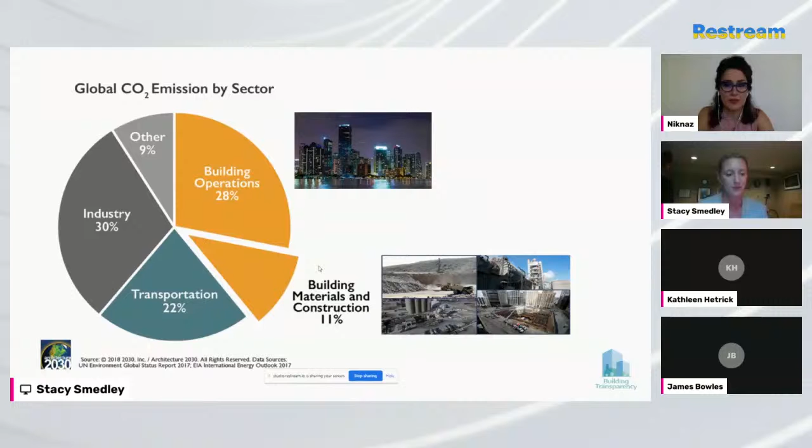Between those two, buildings account for almost 40% of global CO2 emissions. Actually, we believe it's even more than that, because some of these emissions spill over into transportation of materials and other industries that may not be accounted for in that 11%. So all that to be said, CO2 emitted by our building stock is a very big component of global CO2 emissions, which are of course impacting our climate.

I like showing this graphic as my cartoon version of how to visualize these emissions. If you think about operational carbon, light switches go on, HVAC units start working, and energy grids are giving that energy for all those things to happen. To the left is everything else: how we manufacture materials, transport materials to a construction site, install materials, replace them during a building's life, and then demolish them at the end of that building's life. All of that is in this embodied carbon emissions bucket.

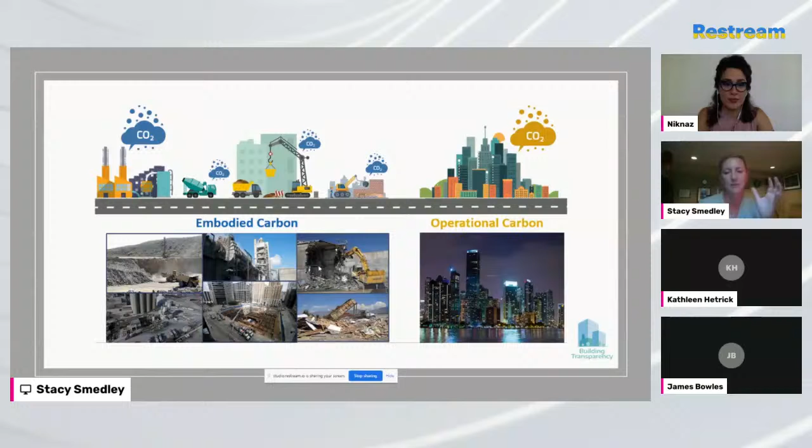We have tended to focus on this operational carbon bucket most explicitly over the past 4 or 5 decades. So there's an urgent need to catch up in terms of our understanding on embodied carbon.

Another reason for this urgency is that we are building a lot. In the next few decades, we're building over 2 trillion square feet of buildings worldwide, which is about the equivalent of a New York City every 30 days for the next 30 plus years.

We now know that these embodied carbon emissions, when you look at a typical building, can be half, if not more, of a building's emissions over its life. That's because they're spent at the time of manufacturing and installation, largely in terms of these emission sources. And we are getting better at the efficiency of our buildings when it comes to operational carbon, as well as decarbonizing our grids. So embodied carbon becomes vitally important.

I'm not going to go into all the technical details in a longer presentation, but there are these stages of emissions that we're talking about. Work that we've done at Building Transparency really puts a pin on the point that the majority of these emissions for major construction materials—this is looking at concrete—are in that production stage, how we make the material, which means we have to make the decision on a lower carbon material at the time of production and specification. This blue bar is the production, and then everything else, transportation, is on top.

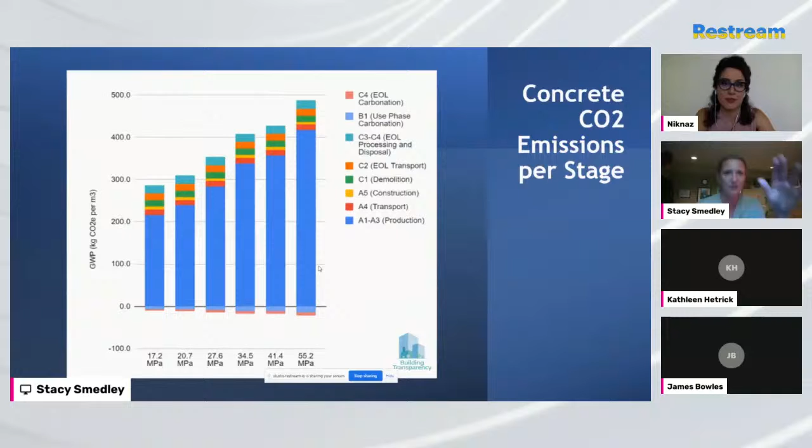Just another example, the same is true for steel. If you look at the manufacturing emissions of steel, even next to the transportation globally of steel, those manufacturing emissions are the place where the major emissions are happening and need to be reduced.

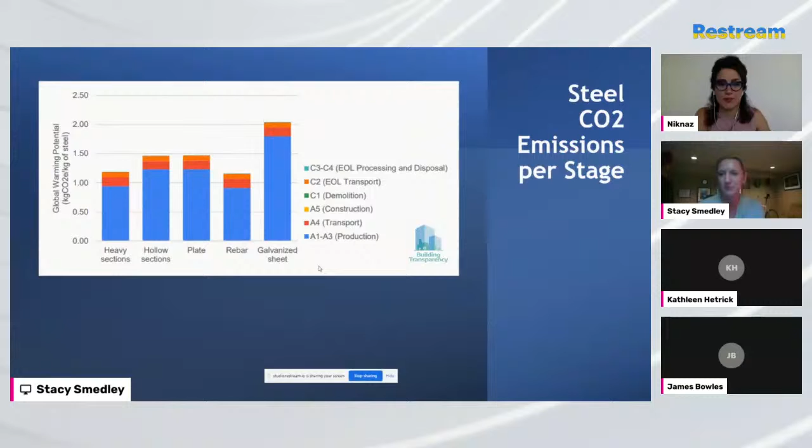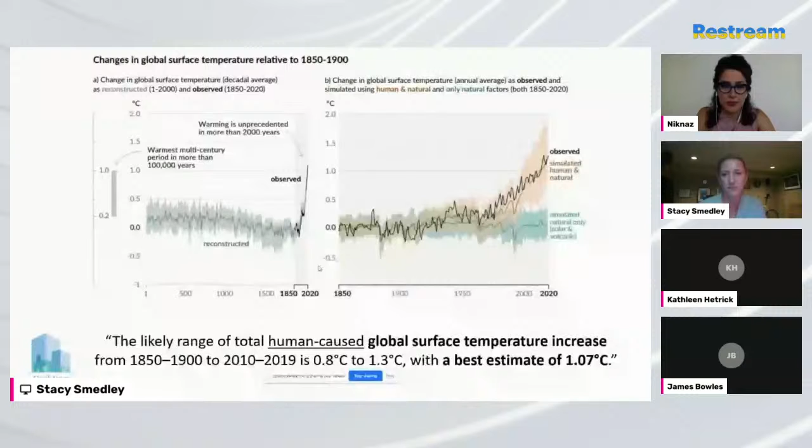We are at a tipping point when it comes to this, based on what's happening with climate change and the commitments that we're seeing come out of various places. We're trying to meet our temperature increase limits. We're understanding that we're actually blowing past them with the new science reports coming out of IPCC. And we're actually now experiencing this.

I love this graphic of what was predicted to be 2050 by a weatherman in the UK, and then what happened just a week or two ago of us actually meeting those 2050 hypothetical temperatures. So the time is now for us to really reduce.

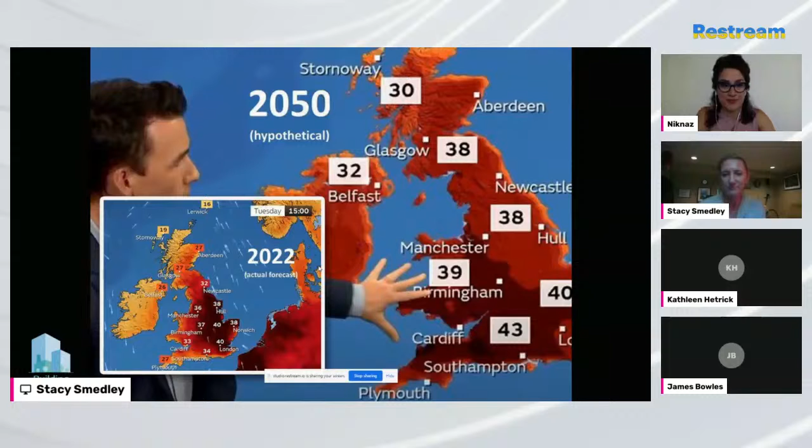At the same time, we're seeing commitments coming at both the private and public sector. Private corporations are building in zero carbon commitments around these embodied carbon emissions of what they make and what they build, and now actually trying to meet them.

On the public policy side, we're also seeing this notably in 2 different places where Building Transparency is engaged. One is through the United Nations work to create a decarbonization initiative around concrete, cement, and steel, using disclosure and reduction targets that countries could sign onto.

And then just this week, in the bill coming out of the federal budget, there's about $5.5 billion in investment for disclosure of carbon emissions of building materials by manufacturers, and procurement pilot programs that would incentivize low carbon materials to be procured. So that's very exciting here where I sit.

Building Transparency is a nonprofit where a lot of this work is happening. It's a nonprofit with a mission of providing open access tools and data that can help reduce embodied carbon emissions. We're funded by a variety of different sources across the AEC industry. This is important because everyone has a role to play, whether you're an owner, architect, engineer, contractor, or material manufacturer. Everyone needs to be invested and engaged.

Very quickly, because I only have about 4 minutes left, the way we're providing this data to industry is through a free, open access tool called the Embodied Carbon in Construction Calculator, or EC3. You can go to our website and register for free.

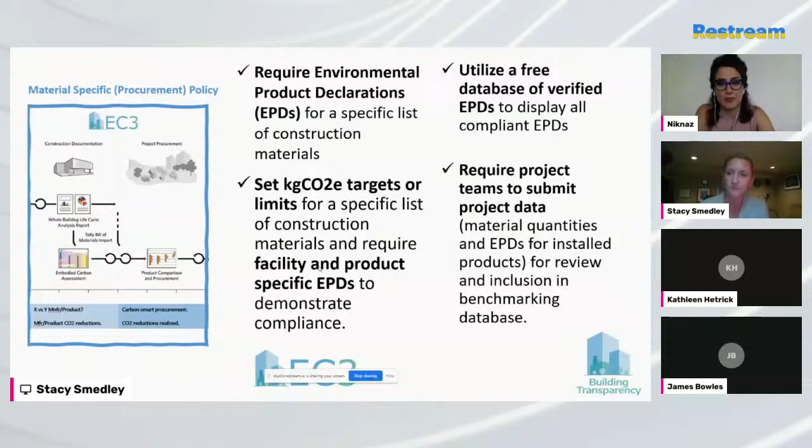A little bit on EPDs. They are the nutrition labels — third-party verified documents of carbon intensity per unit of material. Think about going down a cereal aisle wanting the lowest carb cereal. If you're on a low-carb diet, you get the carbs per serving size. For an environmental product declaration of a material, it's kilograms of CO2 equivalent per unit of material. That's really what EPDs are providing when it comes to understanding carbon emissions of products.

What EC3 allows you to do is go in and actually start doing comparisons across different manufacturers, whether it's concrete or carpet, understand the carbon emissions of all their products, and begin to select low carbon options.

What this means, and what we're already seeing, is as we begin to decarbonize and have this data to make informed decisions, emissions from manufacturers are beginning to lower. Here in Washington State, where we've had environmental product declarations and owners like Microsoft, contractors like Skanska using this data in EC3, there's been an almost 20% emissions reduction for concrete suppliers in our local market.

I'm going to skip through a very quick walkthrough of the tool. You can log in and register at buildingtransparency.org. What we're trying to do is catalyze digital information of these environmental product declarations for a suite of building materials that folks can access and use for comparison.

Walking through how I do this for concrete: you click on concrete, then ready mixed, then next, and dig into concrete specifications — specify a strength and a geography, then click search. That returns all the results of mix-specific EPDs for concrete. You'll see here it's telling us we've got 591 EPDs across all suppliers in Washington State, with the carbon intensities of their 5,000 PSI mixes disclosed. This tells you directionally who the lower emitting suppliers are for concrete in that market or region, enabling you to dig into their products and mixes to make an informed specification choice.

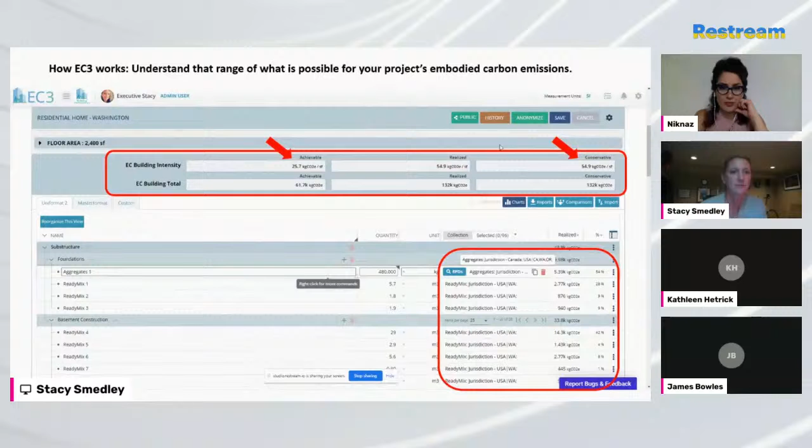Very quickly on the project side, you can build up a project in the tool and put in your quantities. This is very much like cost estimating, where you have carbon intensity per unit versus cost per unit. Here are all the different inputs for the quantities, and here's how you search for those collections of EPD data or actual EPDs within EC3 to set the carbon intensity — enabling the math where quantity times carbon intensity gives you a range of what's possible based on all the suppliers in the market.

You can also visualize where your major impacts are for your project. On the left here is the carbon intensities of concrete versus sheathing panels. So if I was this project, I'd really want to focus on concrete first — it's the biggest carbon impact. Then you can roll all the way up to a building level view of the target you could use for reduction.

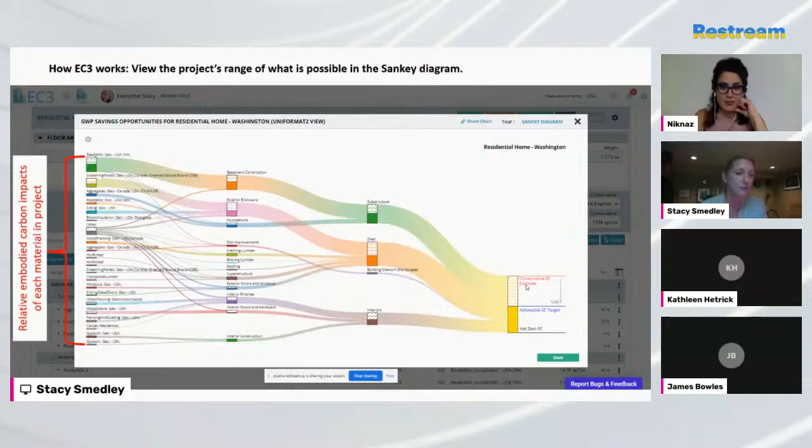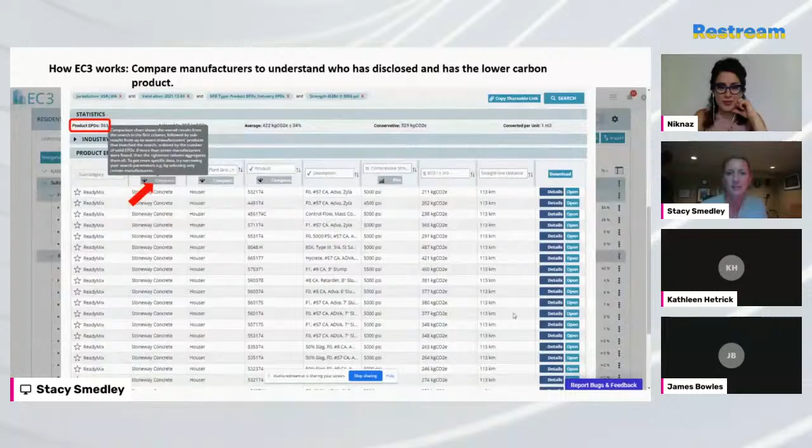I'm just going to skip some of these to save time, but I can go back and click on compare, like I showed you previously. See that Stoneway is my lowest carbon option for my concrete mix. I'll select a Stoneway mix that I think will work for my project to see how it compares to the whole range of mixes for all the suppliers, and then use that in my project to get to a realized carbon accounting for that input.

So again, this is all about getting the data necessary to understand what you actually spent on your project from a carbon perspective, to send the signal to the market that we need this data to be able to do these kinds of accountings. And of course, EC3 is a free tool to hopefully make this as accessible as possible to everyone in the industry. I'm going to skip around a bit because of our time.

I think what we're seeing at this tipping point is that this is becoming something people are beginning to understand and want to do. We've got about 25,000 users of EC3 in 70 countries. Over 2,300 projects have been entered. And what I love most is how many EPDs we're getting now for all these different products in the tool. This is looking at concretes of over 40,000, and for all our other materials, we're up over 3,000 now in terms of construction products with these product-specific environmental product declarations.

This was amazing. Thank you so much, Stacy.

I just have a quick question, and then we'll ask the rest at the end. Are architects and contractors already using EC3? So are architects and designers also using the platform?

And it's really important here, the stuff in the middle, that we think about how this ends up impacting communities as well, because it's not just a carbon story that we're good about. It's also a human health and environmental justice story.

So all along the way, whether we're thinking about the fossil fuels we use to make the plastics in our piping or the manufacturing of the steel, like Stacy was talking about, the construction processes, even how we get rid of things. My brother's a firefighter. If the material that burns up in people's homes and businesses is made with high carbon toxic materials, my brother's health is impacted. So we have to see the whole story and think both from the climate issue, but also the here and now, that human health issue and who's really getting impacted, right?

As designers, architects, engineers, whatever you want to call yourself, we have so much power to do this. And it's real. It's not just cute little graphics that our amazing graphics team made. This is real life for people.

So I'm sure wherever anyone's calling in from, you've seen these, Louisiana, Warsaw, it's similar wherever we go. So it has real impacts, and it's not just about future generations. I mean, I know it's important to think about kids and what's going to happen in 2100, but right now, air pollution is an issue that we can attack when we attack carbon and when we attack our supply chain and attack energy efficiency, right? That's what decarb's all about.

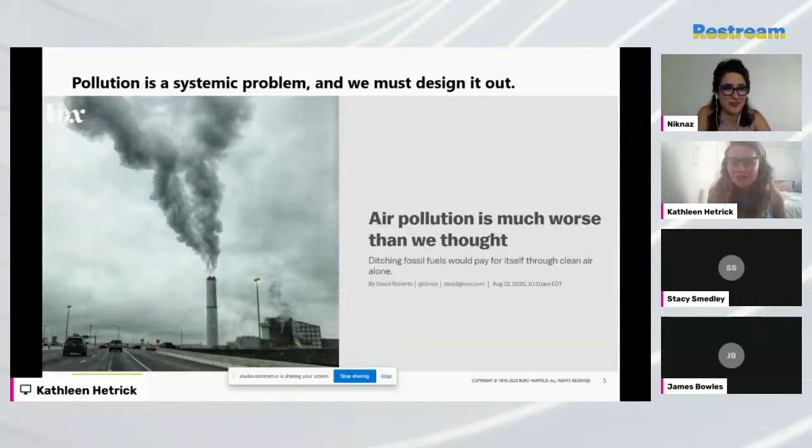It's the here and now, and also thinking about the future. So really exciting that we're getting some federal stuff passed in the United States. It was really a shining light in my life yesterday. And we got to push harder, wherever we are across the globe. At least for us in the United States, all of this decarb work is really important, but we really need to think about environmental justice too.

You can read the great Dr. Robert Bullard. He talks about America being segregated, and so is pollution. And that zip code today, where we live, is the most potent predictor for an individual's health and well-being. So we need, in the building industry, all the great technology stuff, all of the cool, amazing design, Pritzker Prize winners, Living Building Challenge. We can't just think about the occupants that we're designing for. We have to think about everyone that touches this, because too often industrial pollution from our building materials or from the power that we put into our buildings is harming the health and the environment of communities that we don't build for. So we really need to think about this as an environmental justice issue.

So I'll get off my soapbox, one more thing. And I think I'll talk about construction. We'll talk about energy real quick. All of the great work Stacy's doing around how do we clean up industry through embodied carbon. Again, these pollution disparities, we see it across the board, right? Even the way that your facade is coming into a port and then getting trucked to a project site, that's pollution, that's carbon, and it's impacting people of color more than it is for white people.

So we really need to think about this from an environmental justice point of view. And again, if you're working in the ESG space, trying to figure out how social indicators or governance works, all of this gets tied together into that. It's not just an environmental issue.

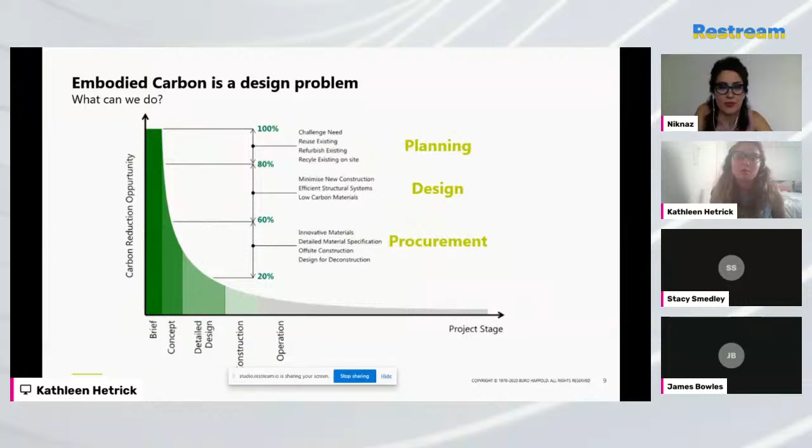A lot of these graphics are from EC3, my favorite tool in the world — I'm in it every day. If you're working with concrete, really start to work with your concrete subs as soon as you can. Ask them about recycled steel for your rebar, ask if they've got fly ash available, slag, maybe they can use 1L cement in there.

And always push your structural engineer — they can save you money on projects, and they have the power to cut carbon. So these are kind of the top things I'd recommend. Really sit down with your subcontractor and ask if they have EPDs for concrete, and how low can they go while still meeting their performance requirements. And ask your structural engineers if they've got GWP targets in their specifications, and if they don't, ask them to do better.

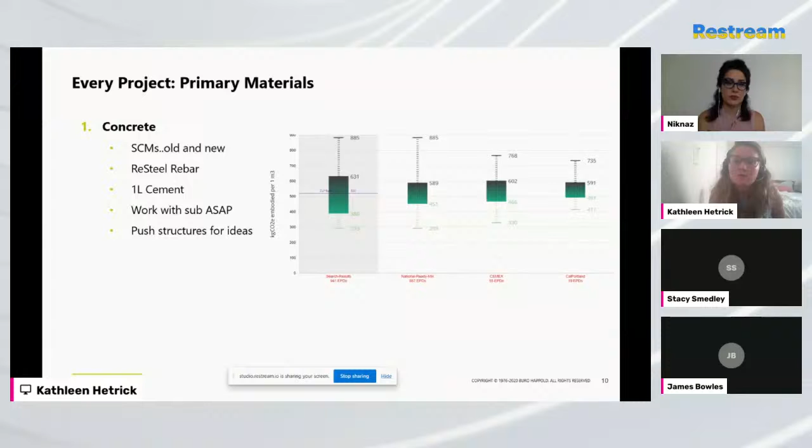Steel comes in such a wide variety of shapes and sizes. Right now, just even choosing wide flange over HSS can really help move the needle. Don't forget all the other steel elements in your projects, like your metal deck and your studs — if you go with a better procurement option, you can reduce some carbon there. Always ask what your local options are. Can you use electric arc furnace instead of blast furnace? EAF will shred carbon in your project like no tomorrow.

We have a lot of it in the United States, and some available in the EU, but if you're working in Asia, you really have to see what technology's out there. We need to be hammering on investing in clean steel, either through green hydrogen or electric arc furnace. It's really something we need to do, and always choose local — if you can work with a local manufacturer rather than shipping it across the world, that's always a really important option for steel.

Work with your subs on fabrication — it reduces cost. When we do our Revit models and come up with some amount of steel we're going to procure, and then suddenly that number doubles, that's not just more cost for your project, but more embodied carbon. So really work with the steel subs on how they actually fabricate and make this stuff, so it's great to not have a surprise halfway through CA where you're sitting on top of a lot more steel than you thought.

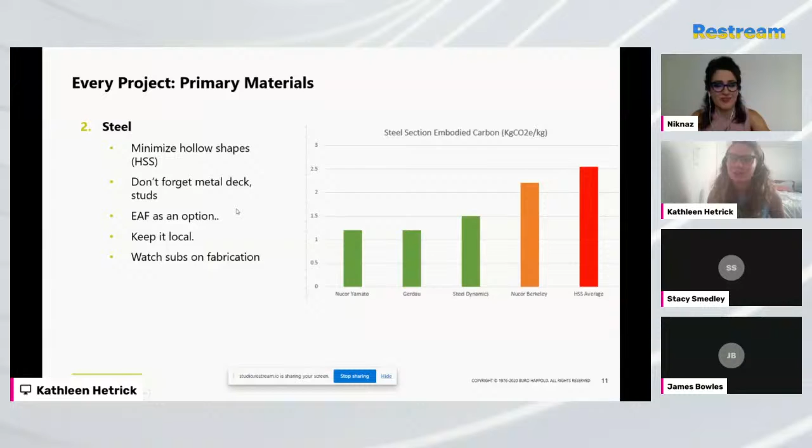For enclosures, I think you can read all the bullet points here, but I would say get XPS out of your projects. I know it's great for energy efficiency, but it's terrible for cancer and it's terrible for carbon. There are a lot of cool companies now doing very high-tech, super sustainable versions of XPS — I think Owens Corning's got a product that isn't using dangerous HFCs to make it.

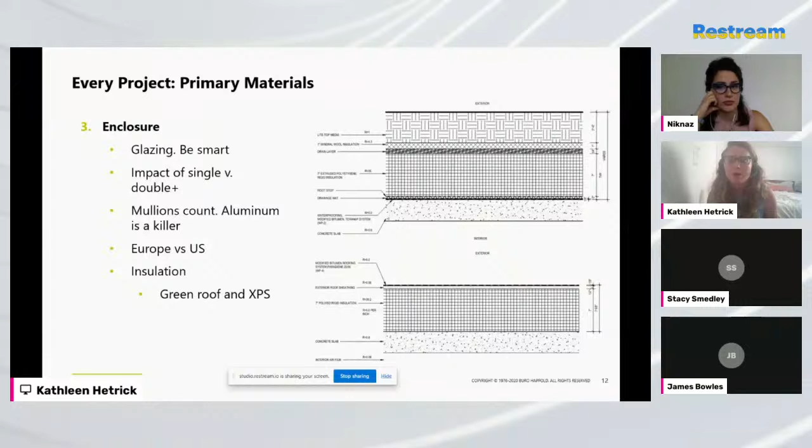Whatever you can do to get it out, insulation is always kind of that top thing to take a look at in your details. See how you can remove this, because it really packs an embodied carbon and a health punch. For your wall assemblies, architects design these every day, in and out, you've got your standard details—go into EC3 and really dig into it.

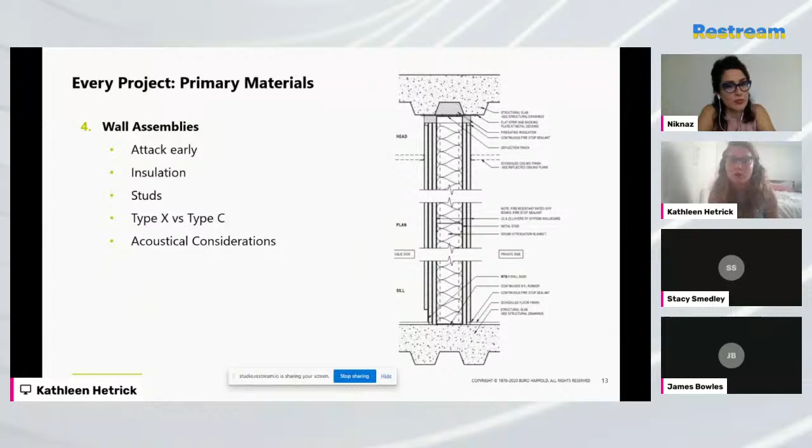How can you choose the most sustainable wall board? Can you try out sheep's wool insulation for your batt-on projects? There's so much you can do to just have a standard detail that's super low carbon. And it's a hard job—you also have to think about acoustic considerations and what's going to meet your client's requirements. But we really think that having really great details with super low embodied carbon, you can do a lot with your wall assemblies.

And finally, floor and ceiling—just simplify it. You don't have to have a concrete slab and then carpet on top of it. Just keep the concrete slab, but maybe that concrete doesn't need to be 5 inches. Maybe you can be a little bit smarter, separating the structural elements from the aesthetic elements.

There's a lot of EPDs out there for carpet—really good ones. You can go with some really low, almost carbon-neutral products that are way better than business as usual. But you can also look at some of the tried and true stuff: find reclaimed wood, go with bamboo flooring if it's FSC certified, even using linoleum, which is made out of linseed oil.

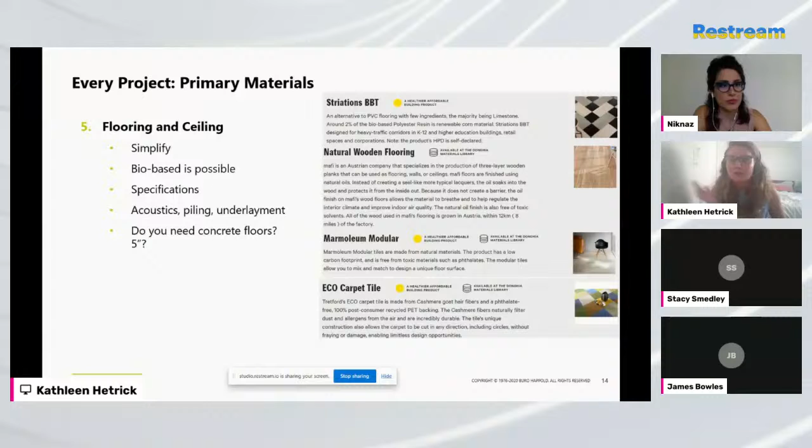So there's tons of options out there, and always use the healthy materials list from Parsons. They have a great list of biomaterials that are sustainable and healthy for people too. So that's just my recommendations for decarbonizing embodied carbon.

Anytime you're thinking about embodied carbon, think about the health impacts too. Concrete and cement making releases a lot of particulate matter, which gets into people's lungs—an issue for COVID, an issue for asthma, an issue for COPD. So every kilogram of carbon you're reducing, you're also improving human health somewhere, even for the people who are mixing it in batches on site. So always think of these two things together.

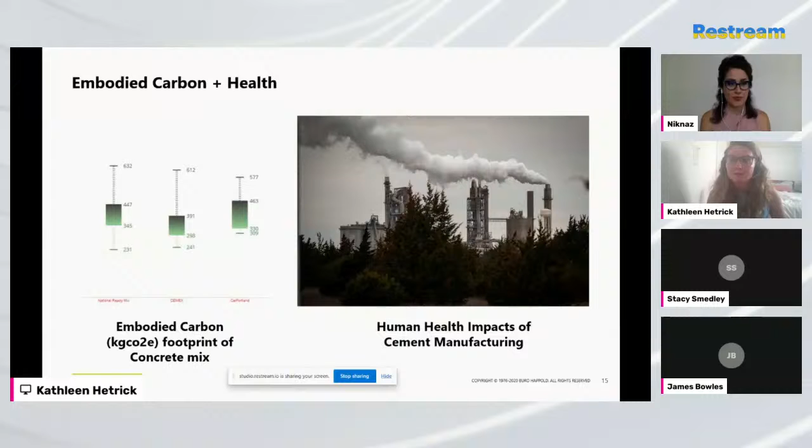On the operational side, I'll quickly talk about a project we have in Los Angeles. We've got a great climate, but if you're in any Mediterranean climate, this will all make sense for you. Basically, you want to throw a bunch of solar on there and make sure you've got a heat pump. Be careful in the United States because not all heat pumps have the low GWP refrigerants—that's a hard thing to think about, how can you do the right thing with refrigerants and the right thing on electrification. But really, it's kind of like a buckshot of lots of different things.

You have mixed-mode automated windows, so you can have natural ventilation—for architects, really keeping the width of your building in a pretty perfect range so that mixed-mode ventilation can work out. So the architect gets involved—if you're going to have a glazed building, you have to spend the money on high-spec glass.

We've also used phase change material, which is a really cool technology. It's pretty old to think about, but they're making it in new ways—instead of needing high thermal mass concrete in your buildings to make the most of those diurnal swings, they're now taking this... I'll show you a picture real quick. Oh shoot, maybe I deleted it—I'll find a picture and send it to you guys. But basically it's a material that acts like ice in that it absorbs heat during the day and releases it at night. It's a pretty benign organic material, and it can really help reduce peak loads in projects.

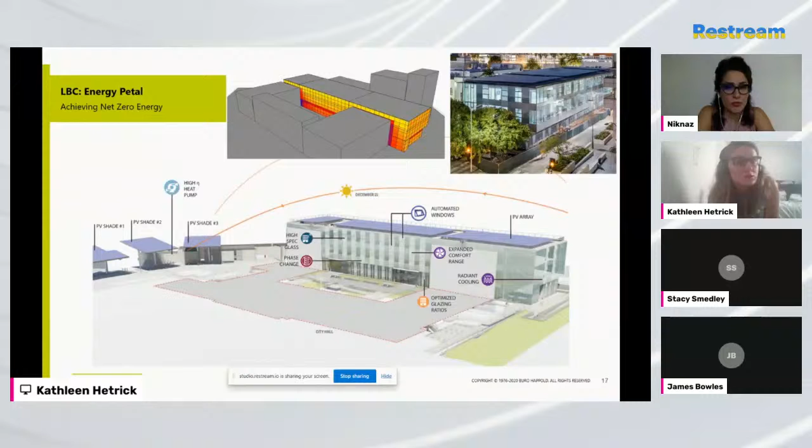Think about putting radiant cooling in your slabs rather than old school systems. This is really important for us, especially as we think of resiliency. It's going to get hot everywhere. Whether you're in Texas, Australia, or the EU, we're running into heat waves just last week.

So think about how buildings operate in the summer season. Can you do a lot of natural ventilation? Maybe during your shoulder seasons, can you open up the windows sometimes, check the air quality, and rely on systems like radiant cooling, and then always have a backup system, like even a dumb VAV system that can hit your peak loads. That's really going to help us design for efficiency and sufficiency.

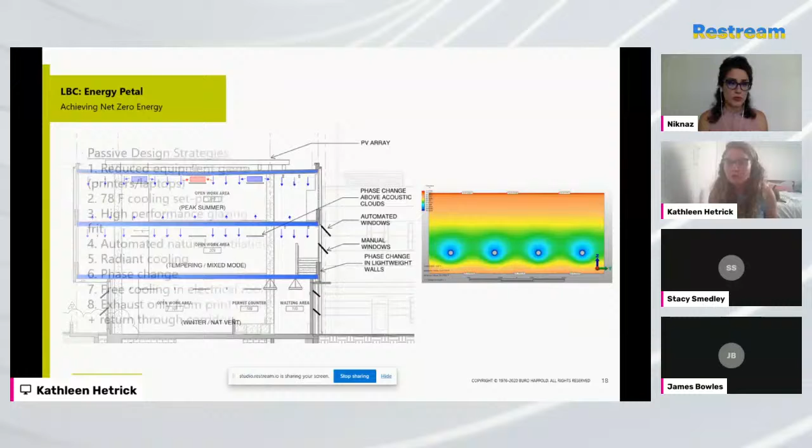And it's not just the technology, it's thinking about how to choose more sustainable process equipment. This is something we're seeing in a lot of projects, that the process loads are going up and up with our server rooms. So how can you work with the owners on choosing better equipment, getting people to get more comfortable with a higher set point? Push that up to 78 or even higher in some countries like India, where people are used to being in the heat, or in the Middle East.

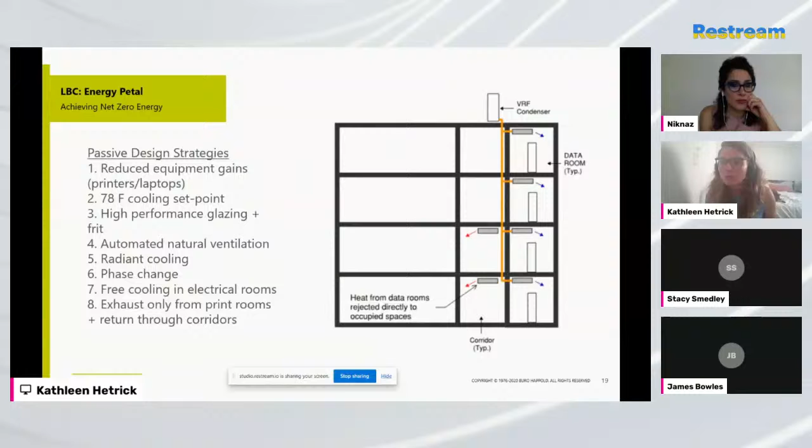How can we get people to really think about adaptive comfort, doing automated mixed mode ventilation whenever we can? That's how you can have electrification where you're not using any fossil fuels, you're just using heat pumps and electrification. But the main way we do this is energy efficiency and building less, so that we have to use less energy as a total. That's really what's going to help you, especially in climates where heat pumps have to work so much harder because they're in heat mode.

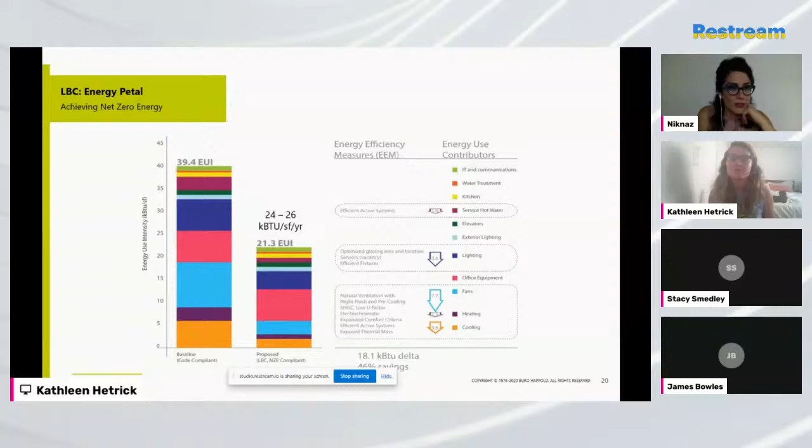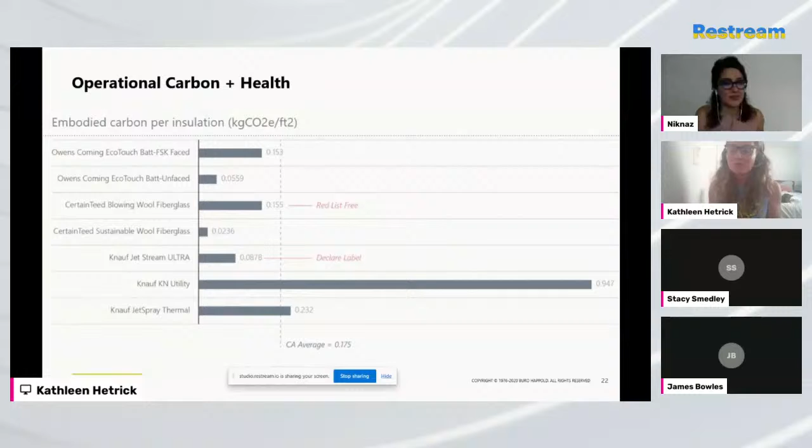If you're building in Chicago or Boston, the name of the game is still the same. We have to push these EUIs down as far as we can, and we have to use passive roles and active systems. There's still tons of health overlaps here too. When you're thinking about putting in your super high performance insulation, don't only think about it from your U values, but think about the embodied carbon.

Use the EC3 tool to look at the different options, and also see that some of them are red list free, or at least have a declare label, so you can really optimize in your specifications how you get your insulation to not only do great from the operational carbon, do great from the embodied carbon, and protect human health.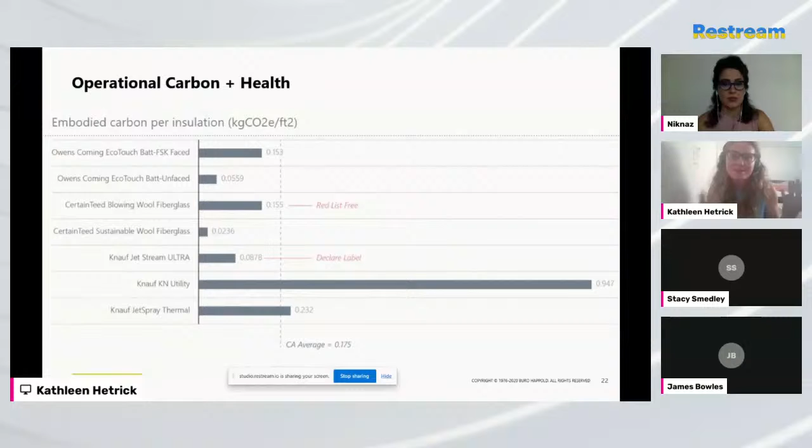My last couple of slides, and I'm going to go a mile a minute. On-site construction, it's crazy—it's so much carbon, we're not tracking it, and it's terrible. So really, we need to be pushing. California just came out with a lot of funding to go electrification for construction equipment. It's a ton, it relies on diesel. All of our construction sites rely on diesel every day, even worse than the typical stuff you throw into your truck or car.

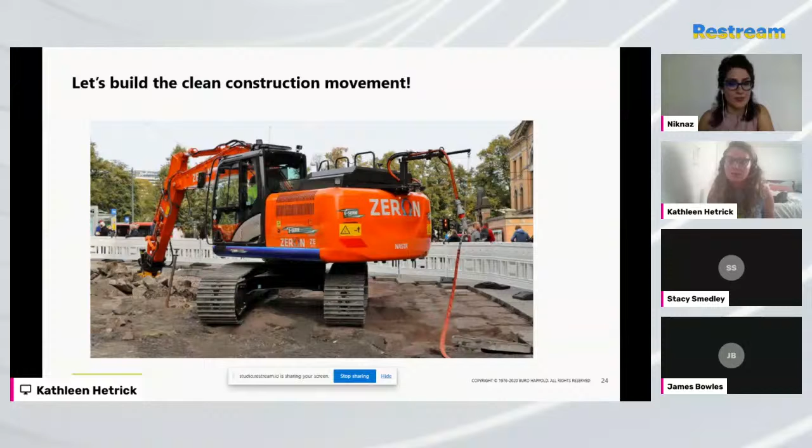So we really need to be asking equipment manufacturers like Volvo or Caterpillar to move into electrification, get them into our projects. There's some really cool stuff happening in Oslo, Scandinavia, and all over the EU right now that we really need to be emulating in the US, even in the way we're thinking about our fleets. This is a really key issue. Luckily, the C40 movement is looking into this through clean construction in Los Angeles and Mexico City, and a couple others are trying to pioneer this. How can we start to build a market for electrified construction equipment? It's really important, and it's out there—just start asking about it.

Ask if you can do solar powered light towers. Ask if you can throw some solar on the trailers. Move away from diesel—there are so many cool startup companies doing electric batteries with solar for backup in terms of disaster use. They've got trailers where you've got the whole thing together: batteries, solar, backup power. Get rid of those diesel generators on site, or at least make them as small as you can, and start asking about this equipment.

We really need to, and even ask if you can get renewable diesel poured into the fuels as a switch—that option is there. We've got great folks like Skanska doing it already. Keep putting pressure on your contractors.

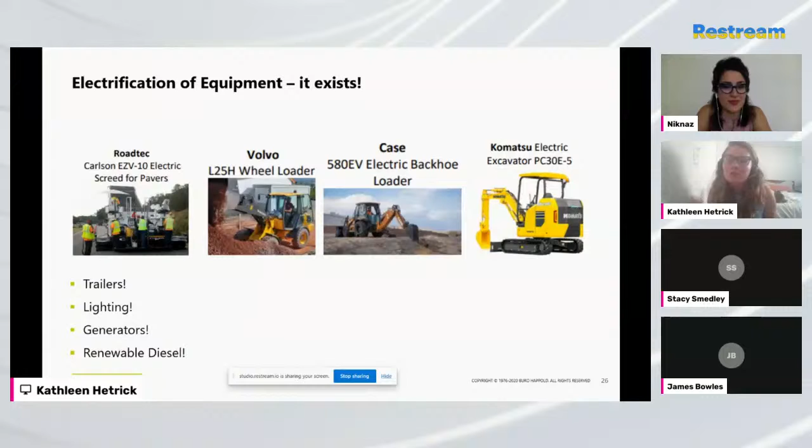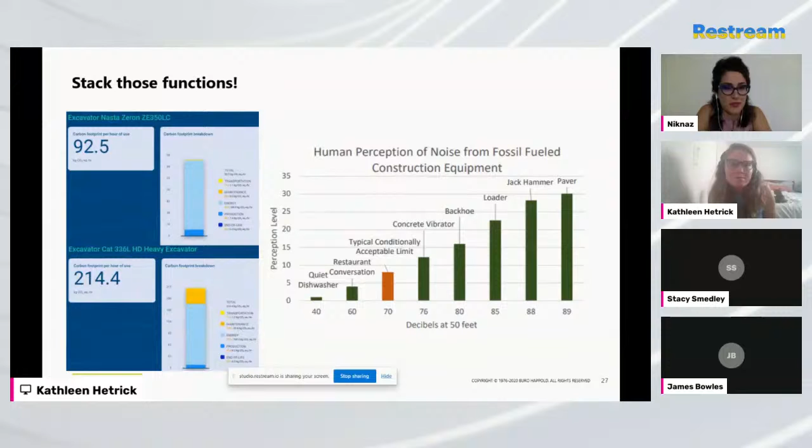This is really important because not only does it clean the air around construction sites, but if you've got an EIR or concerned community, it's also quieter. So everybody wins - less carbon, better air quality, less noisy. Construction becomes a nice thing, not a nuisance.

So I think that's what I have today. Just look around your cities and see all the different ways carbon manifests itself. In LA, we literally have oil and gas facilities right next to people's homes. Every ounce of carbon that we wring out of our buildings and get out of our real estate portfolios means that this doesn't have to be the case anymore.

We need to be putting pressure on our ports, on our airports. That all needs to get decarbonized, so that when we're pulling stuff in from our supply chain, it's really clean. We need to work with our manufacturers to make sure they're not polluting communities when we're trying to design a sustainable building. It has to be sustainable for the communities around us too.

We should be asking ourselves why aren't we on the front lines with climate youth leaders? Not just the Gretas of the world, but everyone, every local issue. Engineers, architects, we should be supporting them and getting involved on the activism side of things.

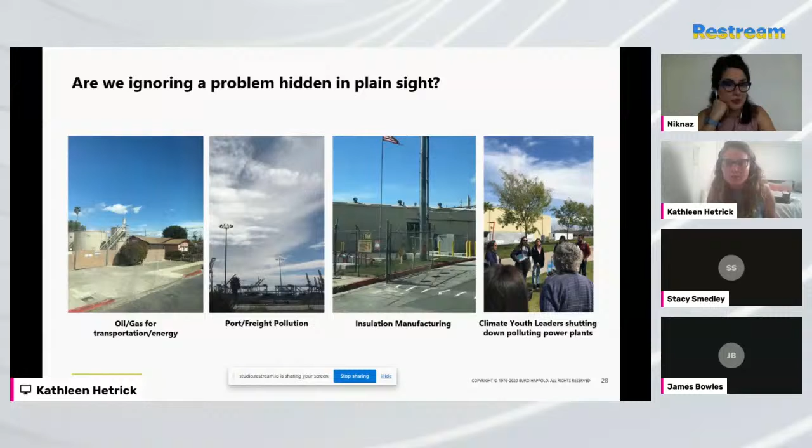Think about your project life cycle. Get local, keep your projects local, buy local. Look at your specifications - they're really powerful. If you're an engineer, an architect, or whoever you are, however you identify, your specifications are power. And if people don't care about climate change, sad for them.

Talk about health - maybe they don't care about human health. Talk about risk, climate risk, flooding, wildfires, power grids failing. And if they don't like that, they probably like money. I can guarantee you, if you really think smart, especially around embodied carbon, you can save people money.

And of course, listen and support your fence line communities. So that's my soapbox. Thanks, guys.

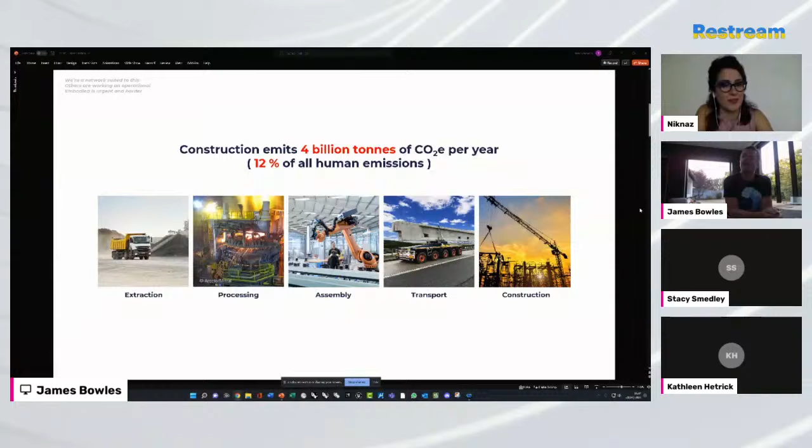I think most of us on the call, and Stacy and Kathleen, you've given a great starter anyway as to what embodied carbon is. It's a big problem, a serious problem. It's 12% of all human emissions, 4 to 5 billion tons of CO2. We don't even know that figure for sure. It spills out into other things. But it's a big problem, something we need to deal with.

If I give a little backstory to where the group came from, this is a post from 4 years ago from a friend of mine, Will Atkins, who posted the idea that all of us should be doing more for this subject. It's not the sustainability person on the project who should be dealing with this, it's not a section of the industry, it's all of us, literally every one of us. I'm not expecting anyone to read that, but if I go through to the next slide, let you read that for 10 seconds.

This is one of the founding principles for our industry group, the idea that all of us should learn more, share more, and do better with our decisions and what we do on projects, the way we go about them. So building less, building leaner, decarbonizing sites, selecting the correct materials, and just doing everything we can.

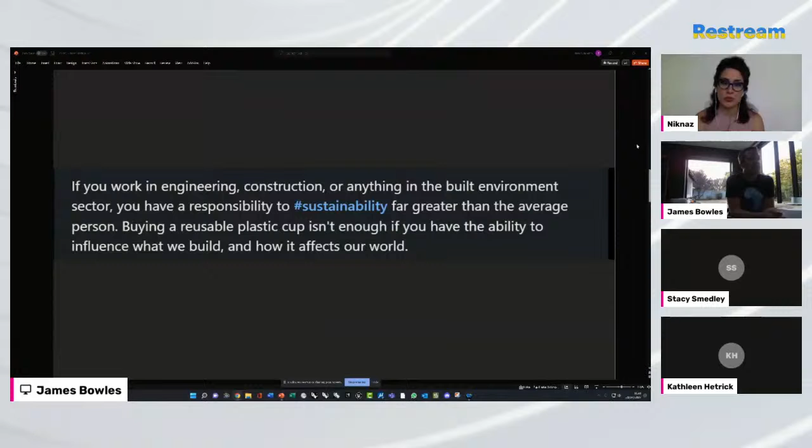We're doing a little bit of social media, but that's going to accelerate quite a lot next year. We want to talk to our kind of, my background's engineering, construction and planning, people like that, and get them on board this journey. We've got a Future Leaders program for people entering the industry, with a mentor program in there as well, and they're kind of activating us, keeping us on this path.

We're completely not for profit, we're independent, we're pro bono, doing this in our spare time. We're building a playbook, which again I'll talk about in a minute. There are 450 members in 40 countries at the moment. We want to grow that, we want to get to 1 million in 5 years. We want everyone on board this. And we're running working groups - this week we had 6 working groups on 6 topics, and I'll talk about those in a second as well.

We have a few sponsors, but next year looks really good for funding. So things are going good. We're growing. It's lots of fun.

That's it there. So because we've got so many things going on, and we've got 25 of us in the core team who are kind of moving this forward, we're trying to do it in our spare time again. We thought we'd strip back everything we're doing to one thing, which is building a playbook.